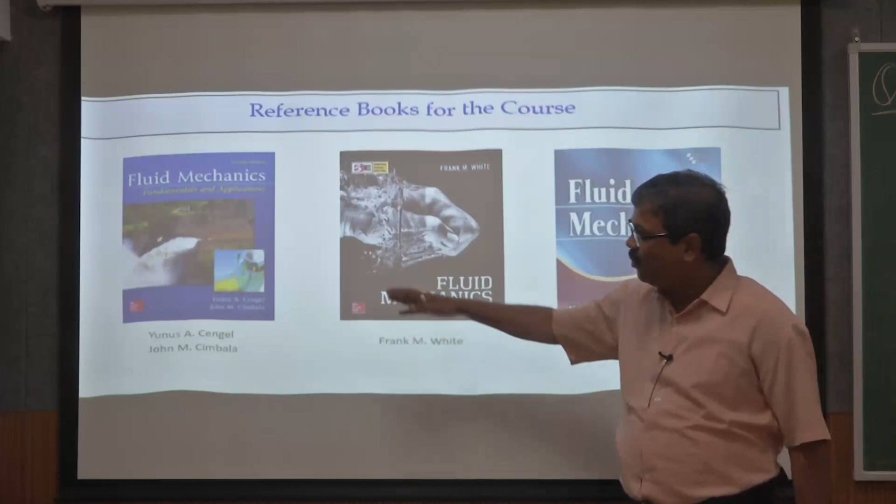As I said earlier, we are again referring to the same reference books, starting from Cengel Cimbala, F.M. White and Bidya Sagar Pani. My sincere request to you is to please look at the Cengel Cimbala book, which gives a lot of illustrations to visualize the fluid flow problems. Fluid kinematics is a very interesting subject, and besides solving the problems, we should also look at the flow behavior and flow visualization techniques. Very good illustrations are there in the Cengel Cimbala book, so please refer to that book along with the other two books as we referred earlier.

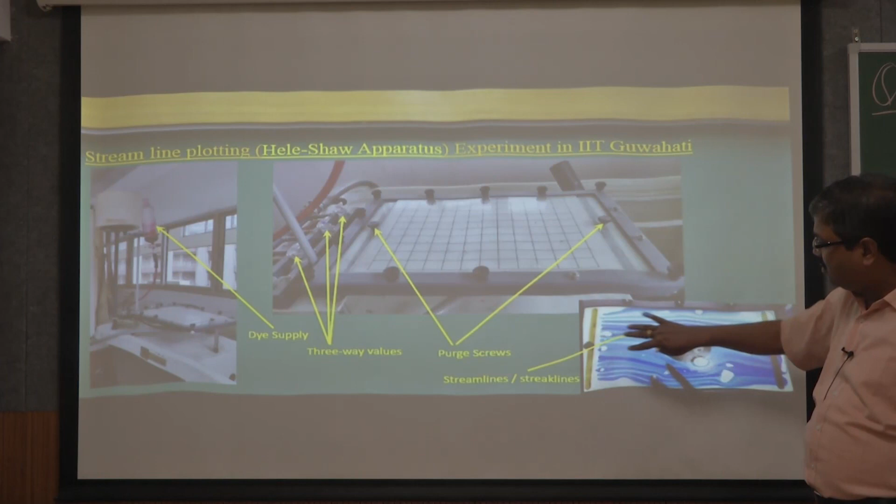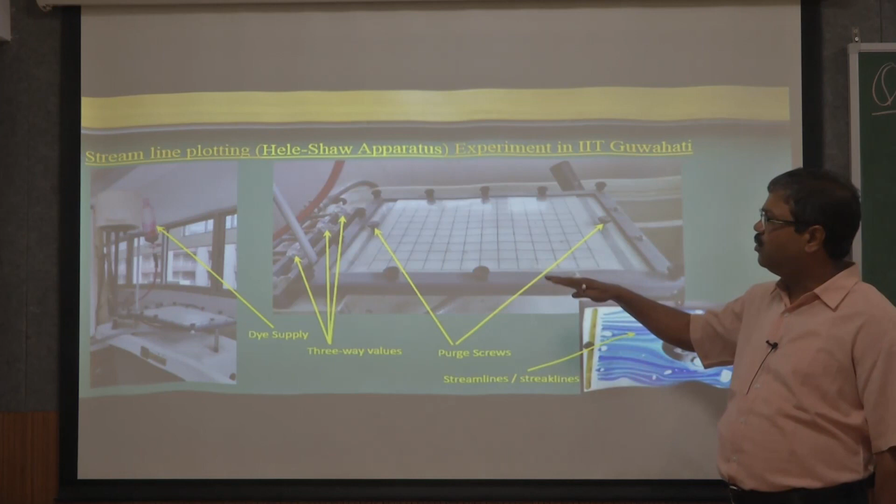We could conduct a very small experiment called the Hele-Shaw apparatus. With an apparatus like this, you can create streamline patterns, streak line patterns, and path line patterns using this small device. For example, if you have obstruction structures like this and flow patterns like this, you can see the streamline patterns, what is going on near the structures and far away from them. So it's very easy to visualize the flow when you use an apparatus like the Hele-Shaw apparatus.

If you look online, very interesting flow visualizations are available on the internet. Please refer to these flow visualization videos available there. For example, here it shows how wake formations happen just behind cylinders when uniform flow is going on, and how these wake formations happen is a very interesting phenomenon.

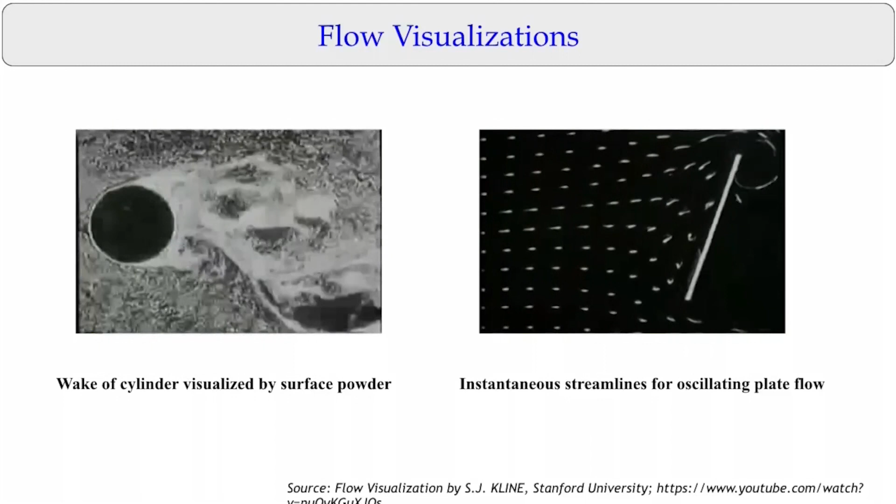Similarly, you can have an oscillating plate, and because of the oscillating plate, the streamline patterns change with respect to time. The path lines and streak lines can all be visualized using this type of video. So my sincere suggestion to you is to please visualize these flow patterns by visiting YouTube sites, where you can see how the flow patterns are changing.

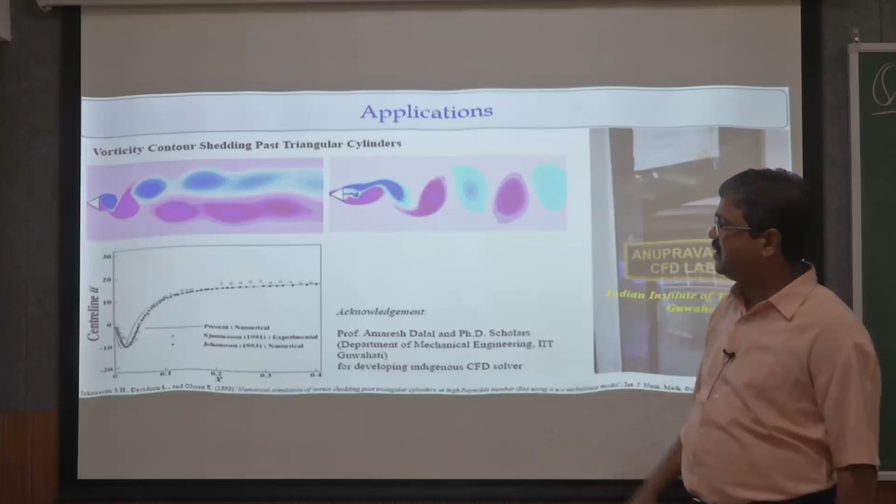This is similar to an example we showed earlier, where if you have triangular structures, you can see how wake vortex shedding happens, and it's quite interesting to see these unsteady patterns of wake vortex. This data is obtained from CFD solutions, and we can get these interesting vortex patterns along with comparisons of how the centreline velocity changes against experimental data.

So what I want to say is that if you look at this advanced level of flow visualization techniques and experimental techniques available today, we can study very interesting flow problems. We can get solutions and visualize the streamlines, streak lines, pressure distributions, velocity distributions, and acceleration distributions — all these fields we can see.

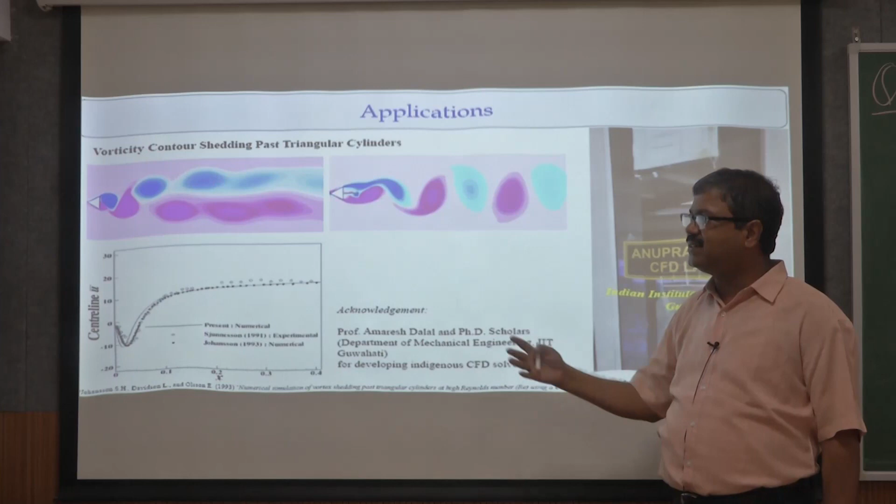With these introductory remarks, let us solve the six problems on the blackboard.

Before starting the blackboard applications, let me recap what we already discussed in fluid kinematics. Any velocity field can be defined by three scalar components, and each scalar component of velocity can depend on position and time, the independent parts — that gives the velocity distribution. Similarly, the rate of change of velocity is acceleration, which we define in terms of local acceleration and convective acceleration parts.

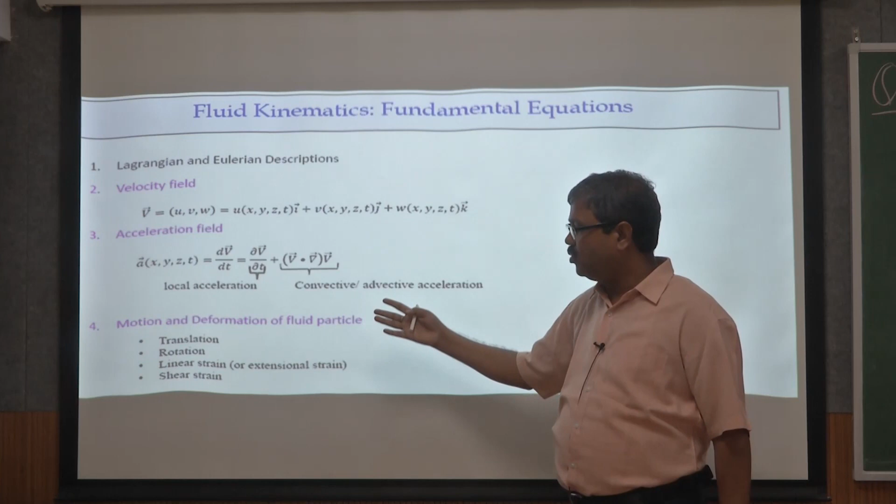Similarly, the motion of fluid particles can involve four types of motion and deformation: translation, rotation, linear strain, and shear strain — we discussed this in more detail in the last class. So here I am just doing a recap for you: the velocity distribution, the acceleration field, and translations, rotations, and deformations like linear and shear strain. If you look at rotation, we can write the rotation quantity in terms of the velocity field. Similarly, the shear strain components can also be written in terms of velocity gradients.

And we have the vorticity measures, which we derived in detail. We can compute what the vorticity would be in different cases. Look at that - when the flow is incompressible, that means the volumetric strain equals 0, so the del dot product of the velocity should equal 0. These are the equations we will use in more detail when we try to solve these simple problems on the blackboard.

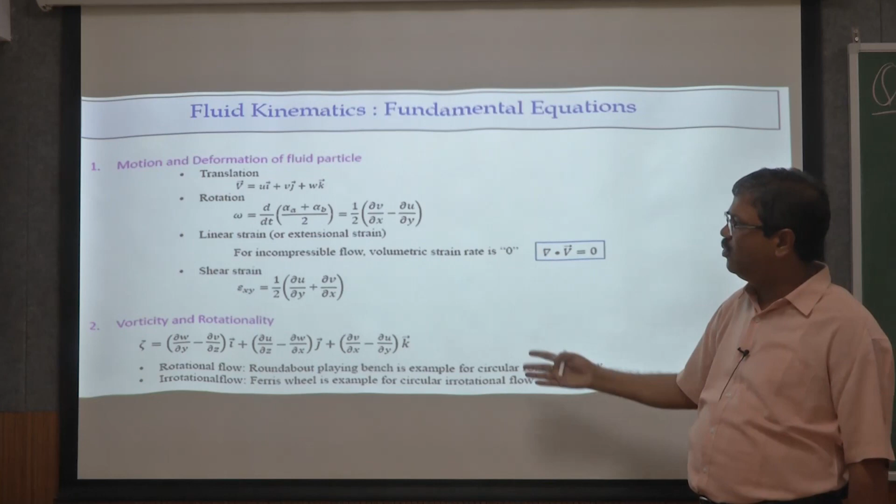So basically these are the recap, the basic equations we are going to use to solve the problems on the blackboard. Let us start the first example.

Example 1 says: what is the irrotational velocity field associated with the potential function given here? We have to find the irrotational velocity field. Does this flow field satisfy the incompressible continuity equation? So it has two steps. The first step is to find what the irrotational velocity field is.

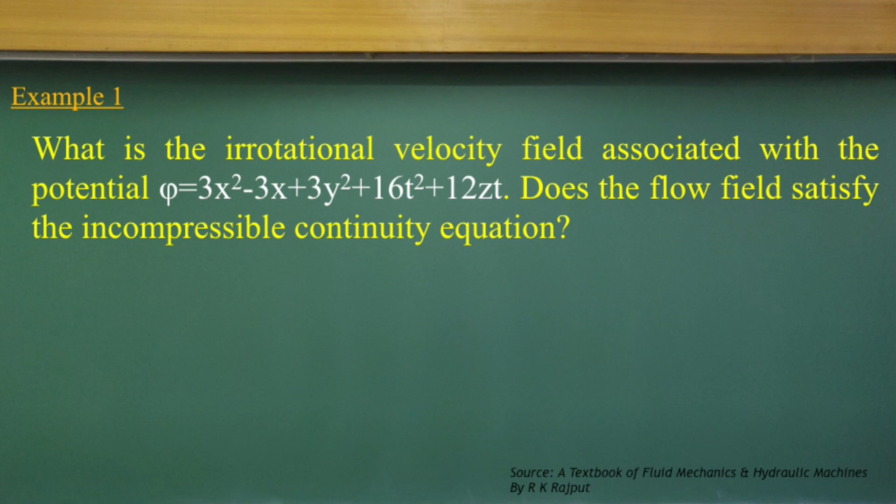So that's the point - it is already given that the flow is irrotational. That's the condition given.

That means for these velocity potential functions, which are functions of x, y, z and t - the velocity potential function is a function of the positions x, y, z and t, as you can see these independent variables.

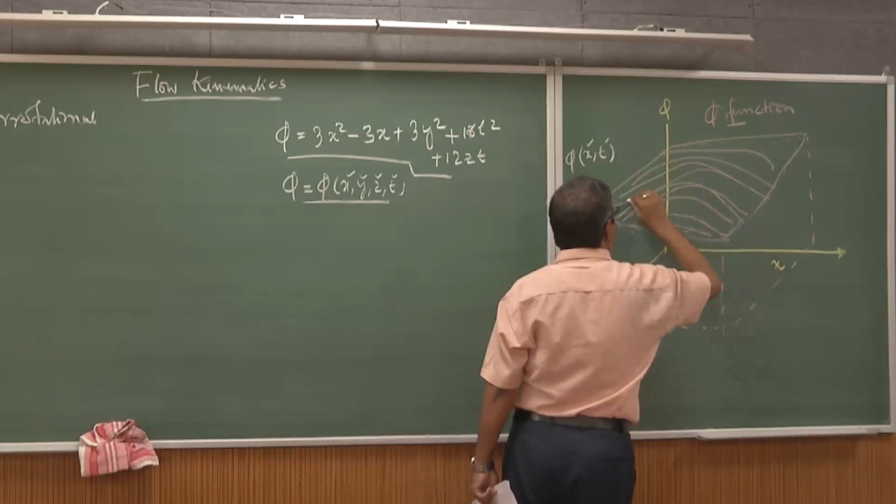Let me give a simple example. If I have the velocity potential function as only one space function and one time function, and plot these as functions of x and t, we can determine what the velocity would be as the velocity potential function satisfies for this flow field.

We know from the definitions that u will be the partial derivative of the velocity potential function, and v will be the partial derivative of the function with respect to the y direction. So these are the scalar components u and v, the velocity functions we can get.

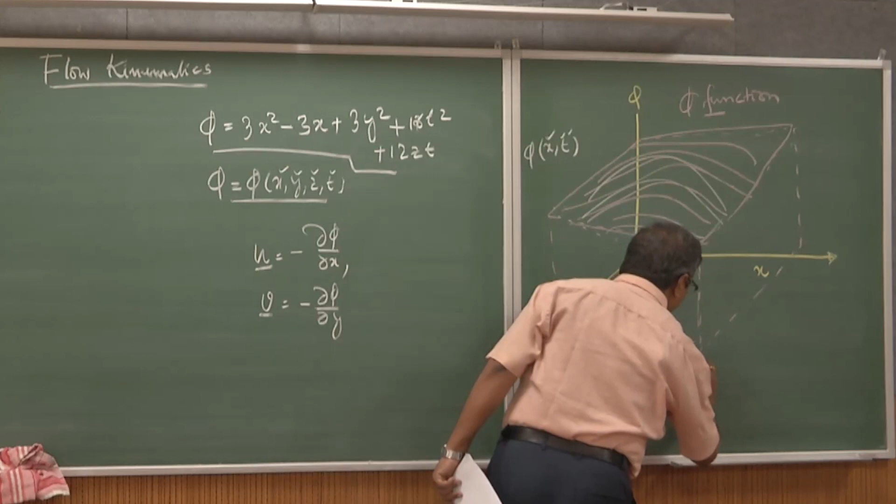So graphically, what this indicates is that when you try to find the velocity from the partial derivative, phi changes only in the x direction when you don't consider the other component - that's the negative of that, which indicates the velocity field for us.

So looking at that definition, let's come back to the problem, which is quite easy for us to solve here. As we know, u is the partial derivative of phi with respect to x with a negative sign, because it's in the opposite direction. Similarly, v will have a negative sign as well.

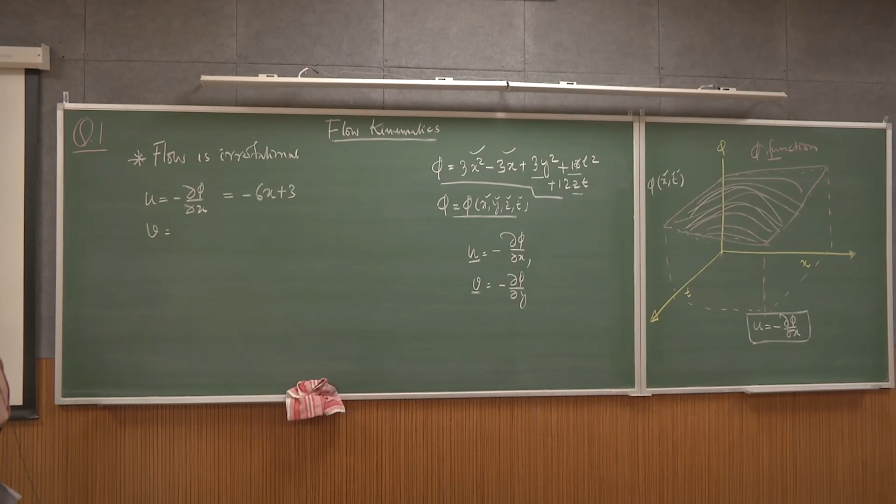If I substitute that value and compute the partial derivative of phi with respect to x, you can see that except for these two terms, I don't have an x term here, so those terms become 0. If you do the partial derivative, you get minus 6x plus 3. The same way, if I compute the scalar velocity field in the y direction, it will be the partial derivative with respect to y.

If you look at this equation again, only y appears in this term, so the others can be considered constants. If you do the partial derivative of phi with respect to y, you will get minus 6y. So these are the two velocity fields we obtain from this case.

Now, these are the velocity fields - that's part A, which is what we were looking for: the irrotational field.

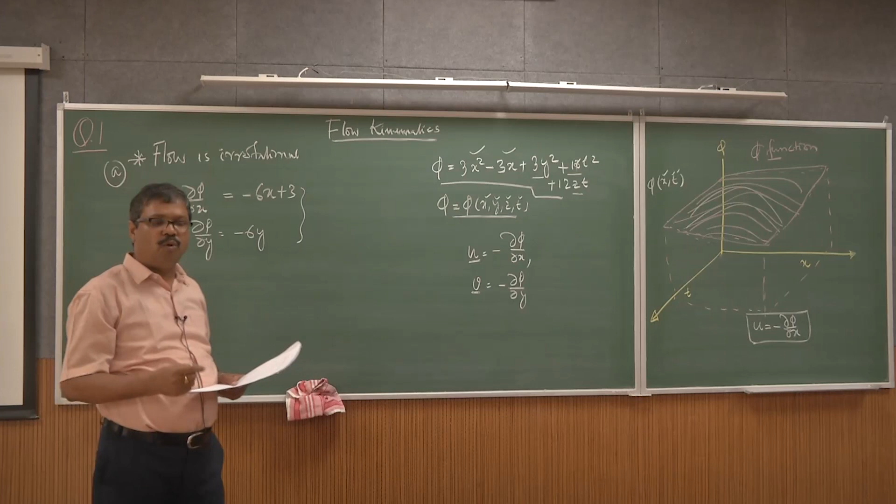Now the second part of the problem: does the flow field satisfy the incompressible continuity equation? Since the flow field we are looking at is two-dimensional, the continuity equation for a two-dimensional flow field will have del u by del x plus del v by del y equal to 0.

So it's quite interesting to look at that. That means we can again do a partial derivative with respect to x, and also a partial derivative with respect to y, and substitute it. If it is satisfied, then we can say it satisfies the continuity equation.

So if you look at this part, if you do del u by del x, we get minus 6. Similarly, del v by del y will also give minus 6. So substituting these values, what do we get? Minus 6 plus minus 6 is minus 12. That means it is not satisfied.

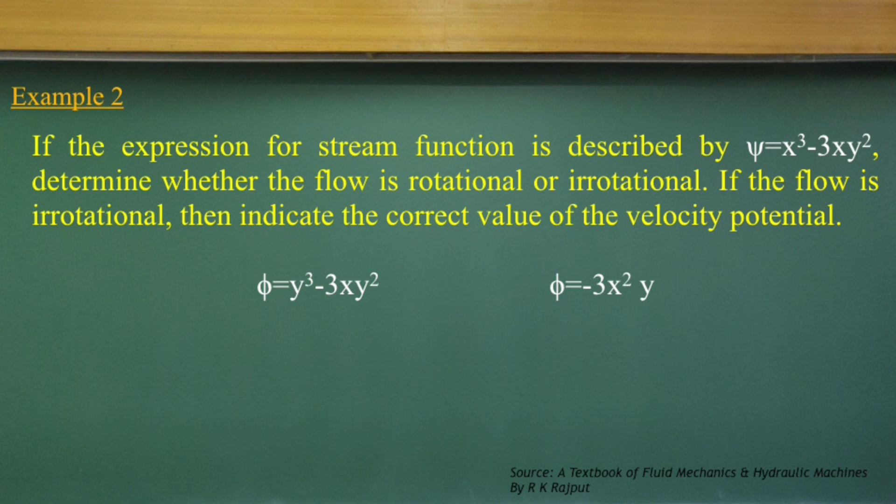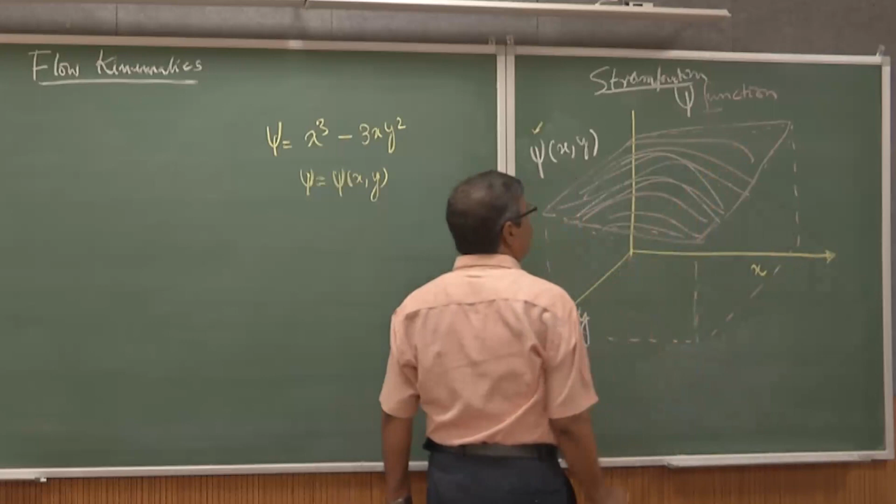The first part of the problem is to prove whether the flow is irrotational or rotational. The stream function is a function of only the two-dimensional x and y, representing the stream function like this, and we try to find out whether the flow is rotational or irrotational.

The question is to find out whether the flow is rotational or irrotational. What do we mean by that?

That means we have to compute the vorticity. If this vorticity becomes 0, that means we can say the flow is irrotational. So we have to find out the vorticity vector.

In this case, it is only two-dimensional. We need to compute the vorticity vector in the z direction. If that becomes 0, then that indicates the flow is irrotational. If not, the flow is rotational.

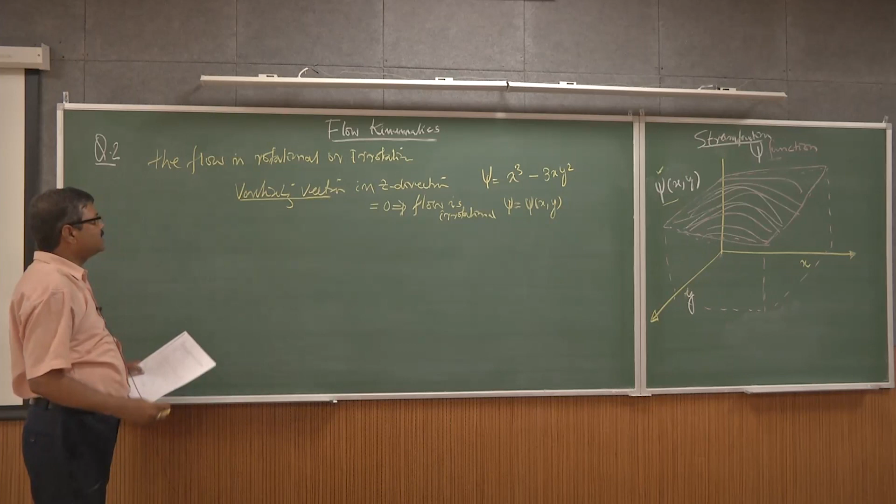Let us compute the vorticity vectors. Mathematically, we define the vorticity vector in the z direction as a function of...

the partial derivative of the v scalar component with respect to x, minus the partial derivative of the u scalar component with respect to y. This is the vorticity vector component in the z direction. So we are just looking at the z direction vorticity component.

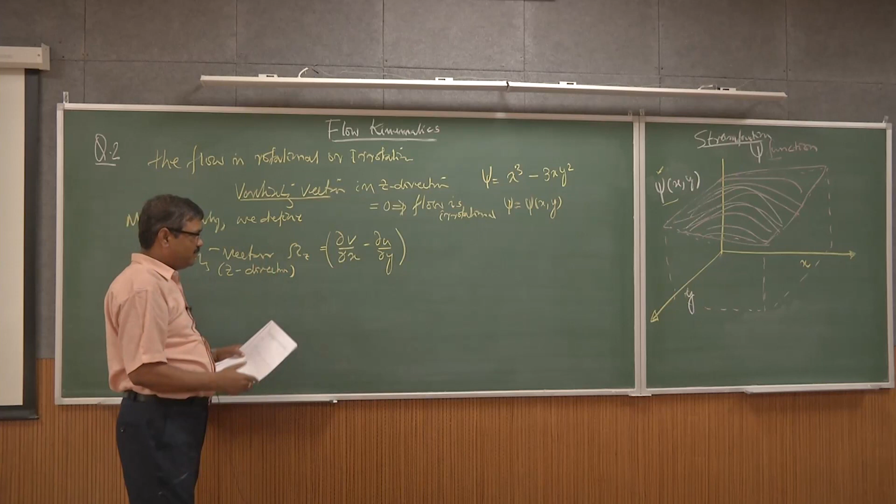Only the z direction. Now the problem is simple: we do a partial derivative of the stream function to compute u and v. Once we know that, we can compute the vorticity vector. What is the relationship between the stream function and the velocity scalar components? By definition...

what we know is that the velocity component u is the partial derivative of the stream function with respect to y, giving the scalar component in the x direction. And v is given by the partial derivative with respect to x; the negative of that represents the v component, the scalar component in the y direction.

By substituting the value of the stream function, we get u equal to minus 6xy... wait, this comes out to be minus 3x squared minus y squared, and similarly for the other component.

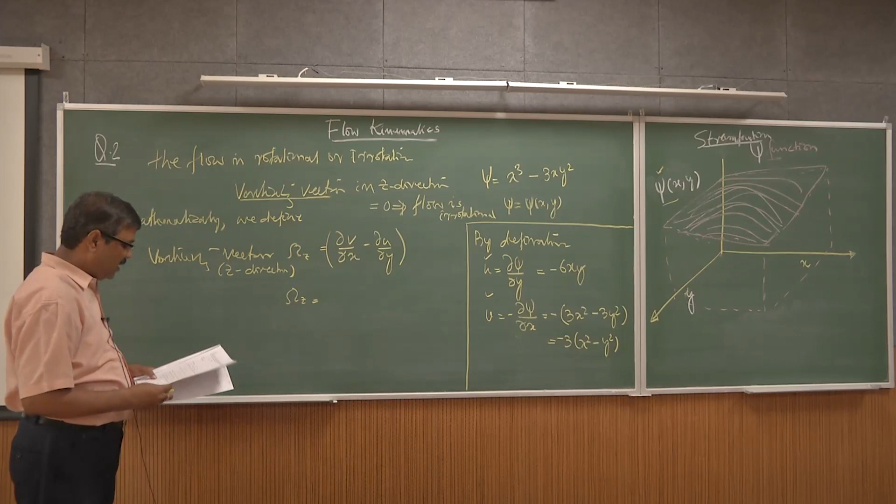That's what you can compute. Doing the partial derivatives, without going step by step, you get minus 6x minus of minus 6x, which equals 0. This indicates the flow is irrotational.

That's the first part of the solution: we have proved that the flow is irrotational, as the vorticity vector becomes 0.

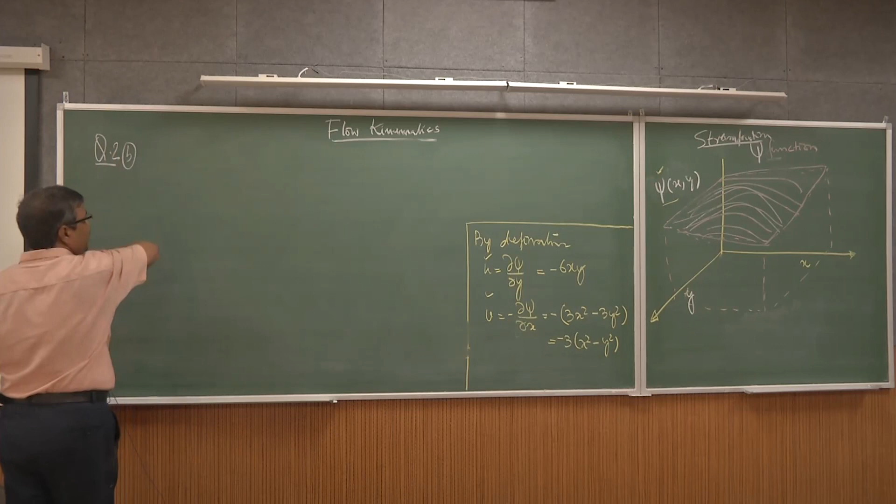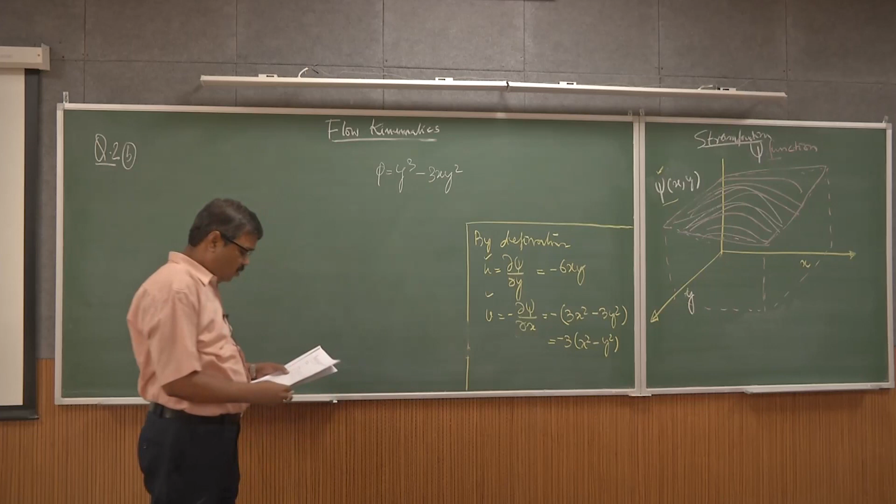That's the first component. The second part is that if the velocity potential function is given to us - in this case, phi equals y cubed minus 3xy squared - we need to find out whether this also indicates the flow is irrotational.

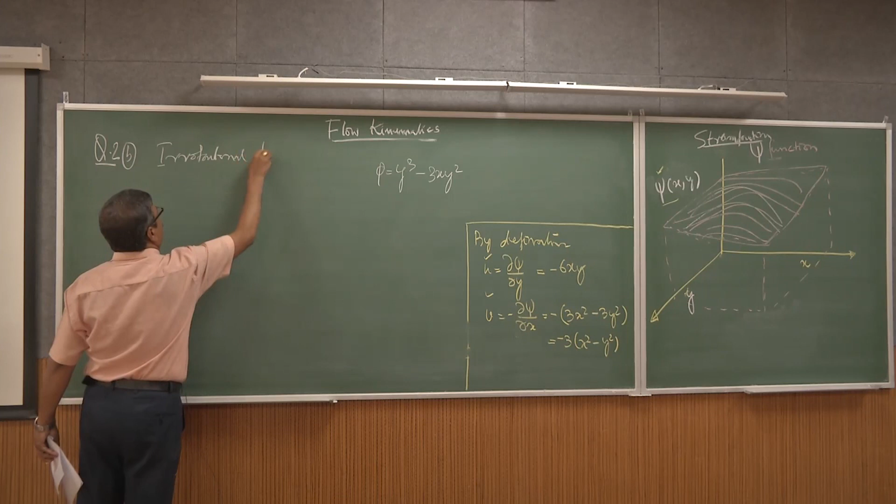That means the condition is the irrotational flow condition.

That's what also we can get. The basic equation for irrotational flow is the Laplace equation with respect to the velocity potential function, equal to 0. This is the Laplace function with respect to phi in the two-dimensional form, the x and y components. So that is indicating for us to substitute the phi value and check does it satisfy equal to 0.

If it is equal to 0, then flow is irrotational. When I substitute this value, we compute the first components, which is, if you just split it like this, you can easily find out what the values could be.

For example, if you take the function y cubed minus 3xy squared, and do a first partial derivative, this 3y squared will come in. If you look at the second partial derivative of phi with respect to x, we can split it like this, and looking at these terms, you can find the first partial derivative gives us minus 3y squared. The second term, since it's not a function of x, will give us the 0 value. The same way, if I compute the partial derivative with respect to y, that gives me 6y minus 6x.

So if I substitute these values, the Laplace equation of phi squared gives us 6y minus 6x. So it is not equal to 0. That means the flow is rotational, and it does not satisfy the basic equation of the Laplace equation, which is the continuity equation for the flow field.

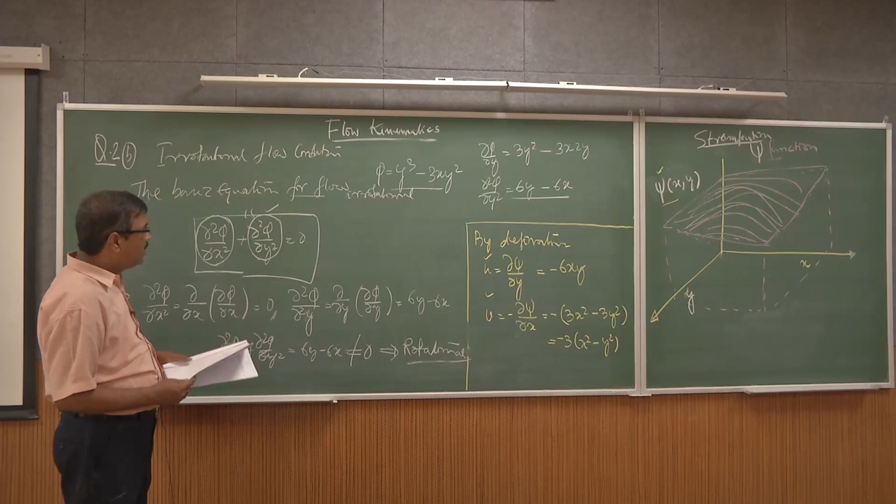The similar way, if I go for the second component where another phi function is given, phi is y cubed minus 3x y squared. So we have to again change the functions and find out whether it satisfies the Laplace equation of the phi value. If it satisfies the Laplace equation, then we can say this is the velocity potential function for this flow process.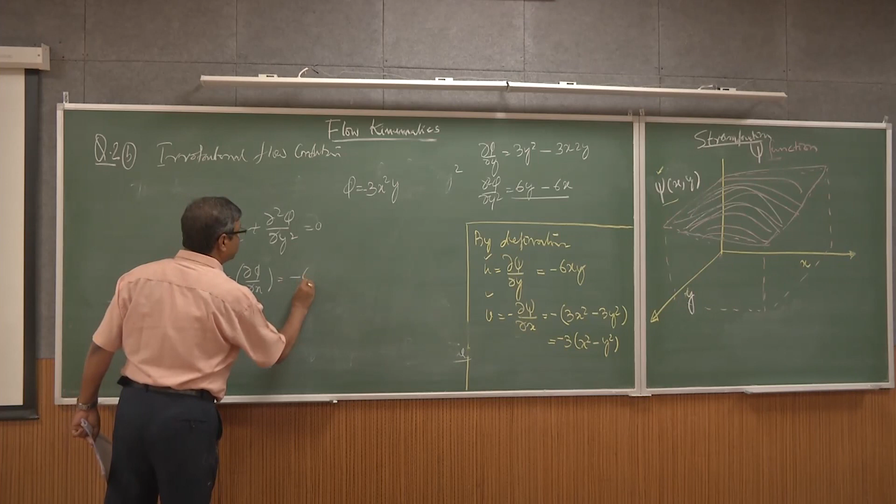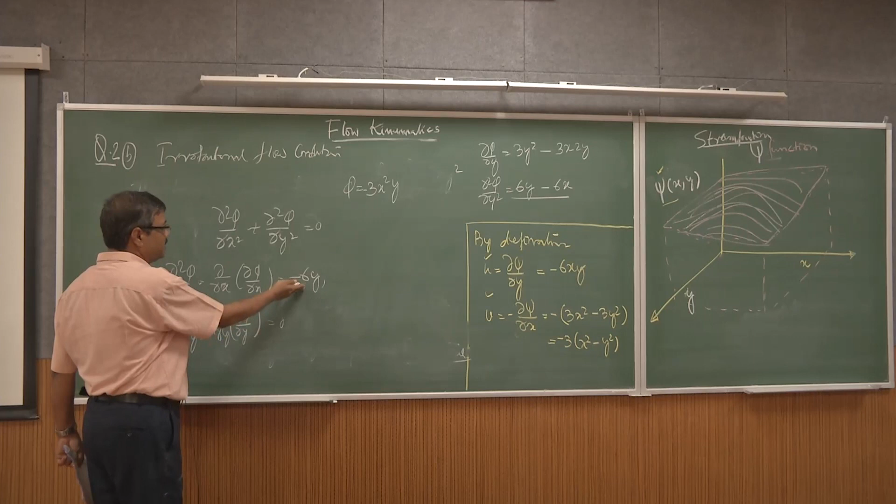If I substitute these values again, computing the partial derivative of phi with respect to x, and the second partial derivative of phi with respect to x, that gives us minus 6y. Similarly, since it's only first order in y, I can easily say this becomes 0. So if you look at these two terms, minus 6y and 0, after substituting into the Laplace equation, that will not be equal to 0.

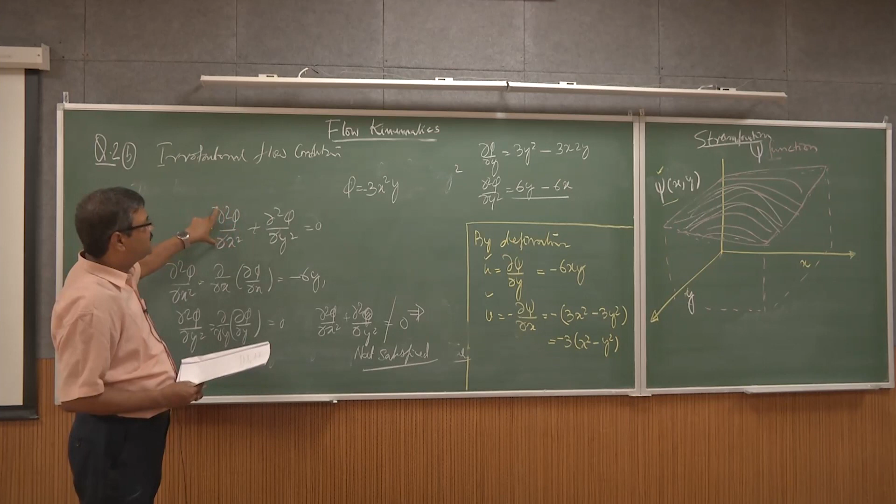So it's not satisfied. This is a very simple example just to check, by substituting the velocity potential function, does it satisfy the Laplace equation? If it satisfies the Laplace equation, that means it's a velocity potential field. If not, then it is not an appropriate velocity field to define this flow behavior. So that is what we have to look at for this case.

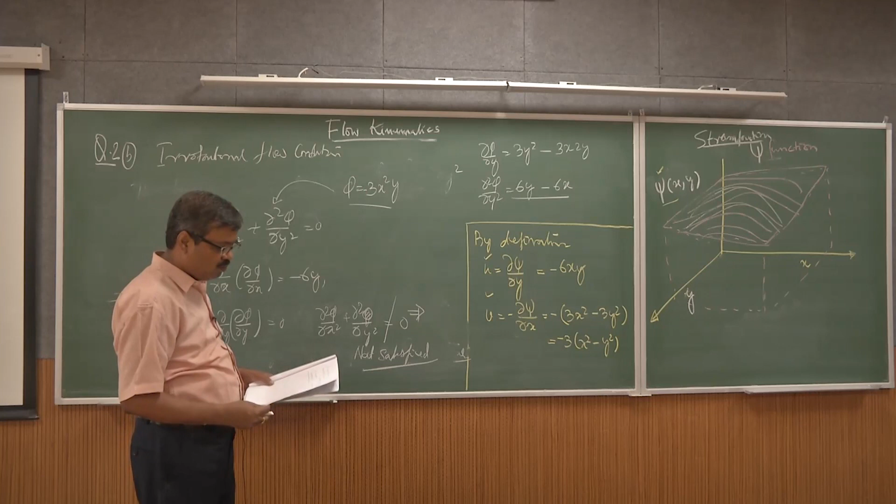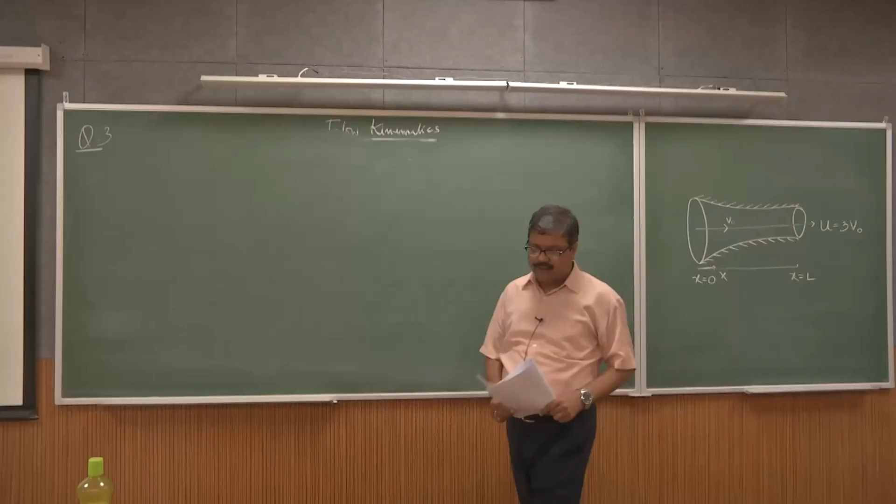Let us solve the third example, which is a very interesting problem. The flow through a converging nozzle as given in the figure can be approximated as one-dimensional flow. A velocity distribution is given with respect to x, and from the nozzle shown in this figure, assume the velocity varies linearly: at the entrance point it is v naught, and at the exit point the velocity will be 3 times v naught. The velocity distribution is given with respect to the x direction. This is the nozzle.

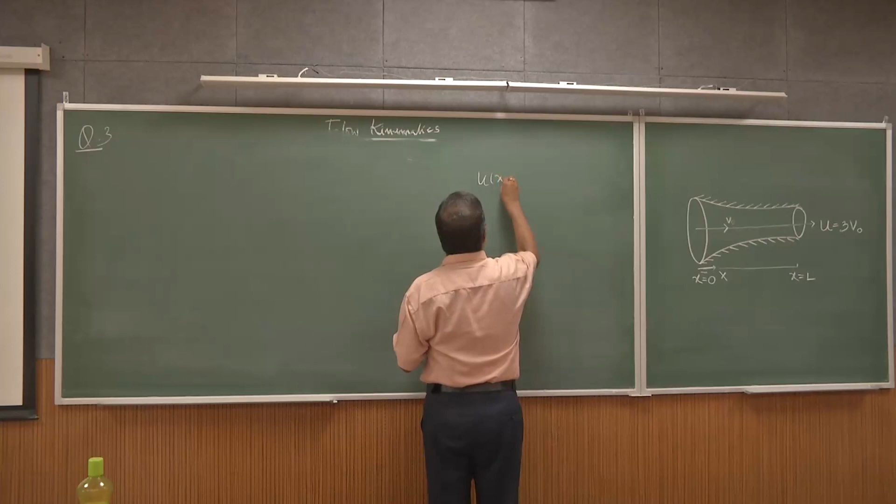The velocity field is given as ux equals v naught times 1 plus 2x over L. This is the velocity distribution given to us.

What we need to compute is the acceleration in the x direction, du by dt, at the entrance point where x equals 0, and at the exit of the flow. Given these conditions, we need to compute what the acceleration ax, du by dt, will be, if the numerical value of v naught is given as 10 feet per second, and L, the length, is 1 foot.

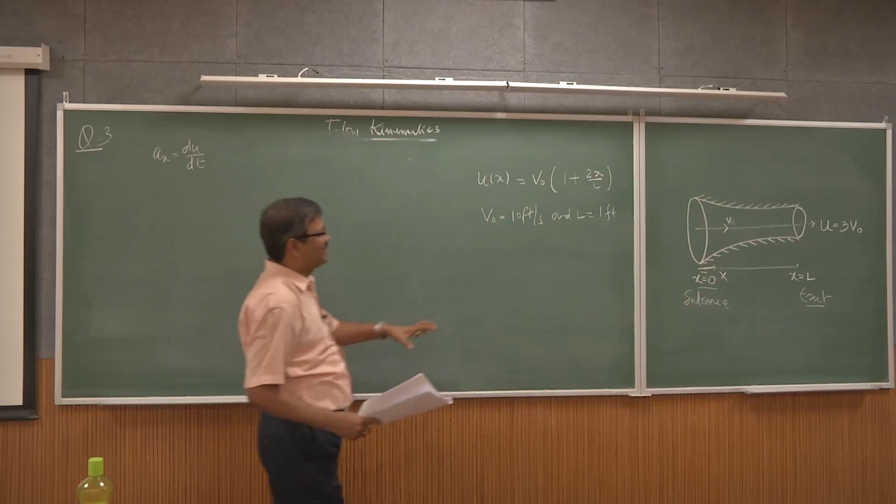Now if you look at this problem, it's very easy. It may be described as converging nozzles, giving the velocity, an increase of velocity as the nozzle dimensions show a decreasing trend. But mathematically, it's very easy since we are defining the acceleration.

Acceleration is the total derivative of the u component with respect to time. As given in the figure, this is a one-dimensional flow, only x direction component, meaning the x direction acceleration along the x direction can be written in a very simple form.

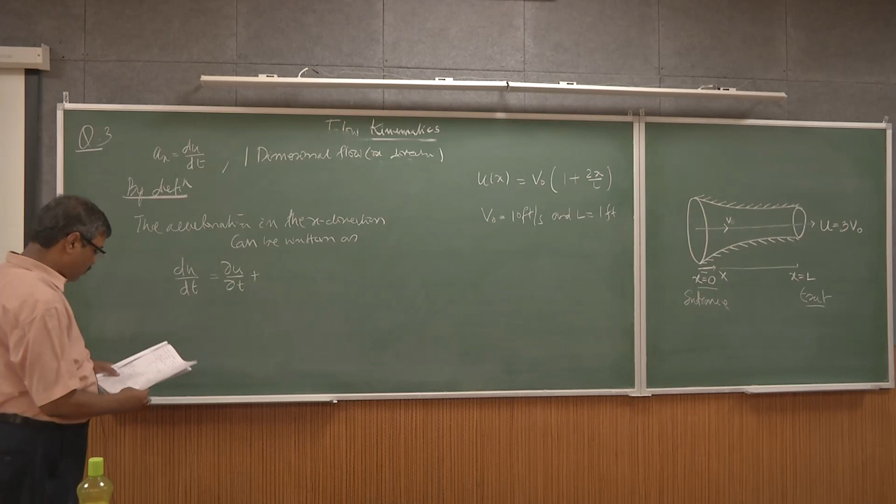It's just taking the definition that acceleration will be the total derivative du dt, which can be represented as the partial derivative with respect to time, the local acceleration component, and the convective acceleration component in the x direction.

But if you look at this problem, what components can be neglected? Since it's a steady flow, there is no time component, so we can make this equal to 0.

And since it is a one-dimensional flow and a steady flow, there is no time component in the velocity field, and being one-dimensional, these components also become 0.

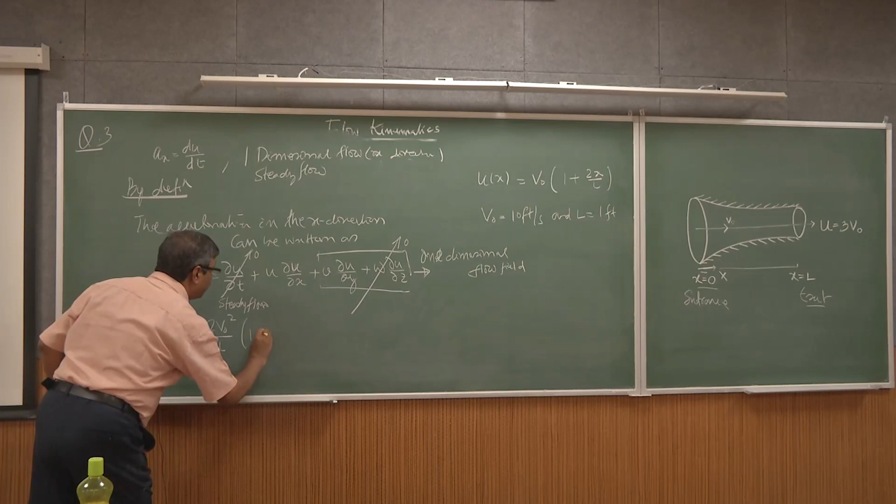So it's quite easy, we just have to compute this part. If you substitute this value and take the partial derivative of u with respect to x, and substitute it, we get du/dt equal to 2 v naught squared by L, times 1 plus 2x by L.

So it's very easy, as you do a partial derivative with respect to x, you get v naught times 2 by L, and substituting the u value, you get this result. So we know how acceleration in x varies with respect to x, as a function of v naught and L.

So we have to find out what will be the velocity when x equals 0 and x equals L, given v naught. So using the given data, we can compute this.

We can compute the acceleration in the x direction, du/dt, at x equal to 0. Substituting the v naught and L values, we get 200 feet per second squared.

The same way at the exit point, where x equals L, substituting the x equal to L value, we get du/dt equal to 600 feet per second squared, which is 3 times v naught. So we can see the velocity is increasing, and the acceleration is also increasing at that point, computed by substituting these values.

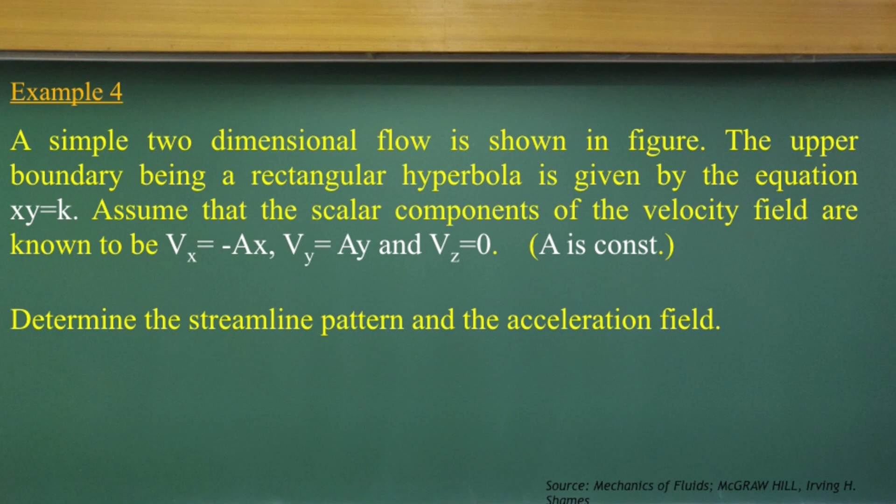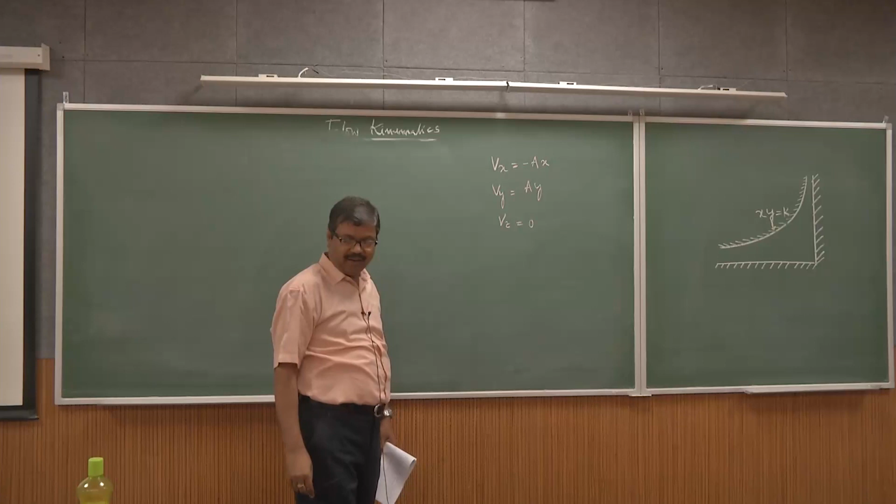Let us come to Example 4, which indicates a simple 2-dimensional flow, as shown in this figure, a 2-dimensional flow pattern. The upper boundary is a rectangular hyperbola, given by the equation xy equal to k. Assuming the scalar components of velocity field are Vx equal to minus Ax, Vy equal to Ay, and Vz equal to 0 as a two-dimensional field, where A is a constant, we have to determine the streamline pattern and also find the acceleration field.

The problem we are looking at requires us to determine the streamline pattern, meaning we are looking at what the equations could be, and also we are looking at what will be the acceleration field.

This problem is a very straightforward equation. Looking at that, as we have given the velocity scalar components, we have to find out the stream functions. Once you know the stream functions, we can derive the acceleration field. We can sketch the stream functions expanding it, and draw streamlines like this. So we are looking at what these functions are, defining these stream functions.

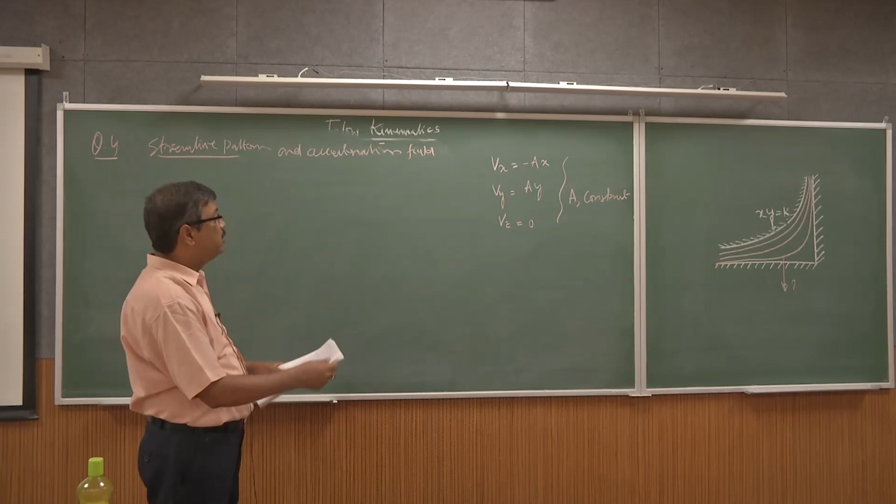Now if you look at the result part, what we are looking at here is that we need to put the basic equations of the streamline equations.

The definitions are the equations of the streamlines. What we know is that dy by dx of a streamline should be equal to Vy by Vx. This is the definition. As you know it, when you take a tangential component of a streamline, that should indicate the velocity vector. This is the velocity vector at this point, and the tangential component is parallel to it. That's the definition of the streamline.

So we are defining that mathematically. The slope of the streamline is equal to Vy by Vx. If I substitute these values, we get minus y by x. So as we are looking at what could be the streamline functions, let me size a streamline function here.

If I do the integration, integrating the above equation, we get the value, or we can write it in a very simple form, as xy equal to c.

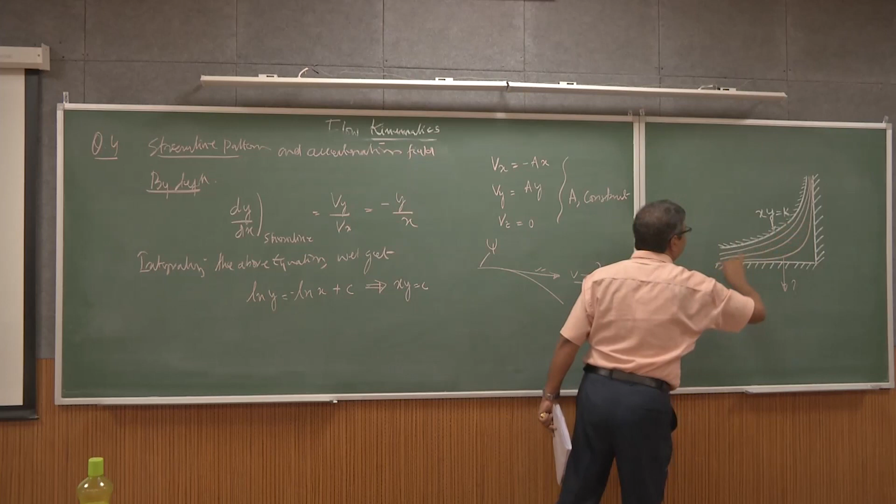That means it's indicating it will also have a hyperbolic nature of the streamline function. That's what defines the boundary, the rectangular hyperbola function which the streamline function follows. That's what we get from this equation for the streamline.

Now if you look at computing the acceleration components, basically we look at two acceleration components. As there is no time component, since the flow is steady, it's very easy to compute. We can compute ax as given earlier: du by dt, the total derivative of u with respect to time, becomes del u by del x times u.

If you substitute, as in this case this is u, and this is the v component, these components become 0. You know its value, but it doesn't have a function of y and z, so these components are 0 and these components are 0. Substituting this value, we get its value equal to a squared x.

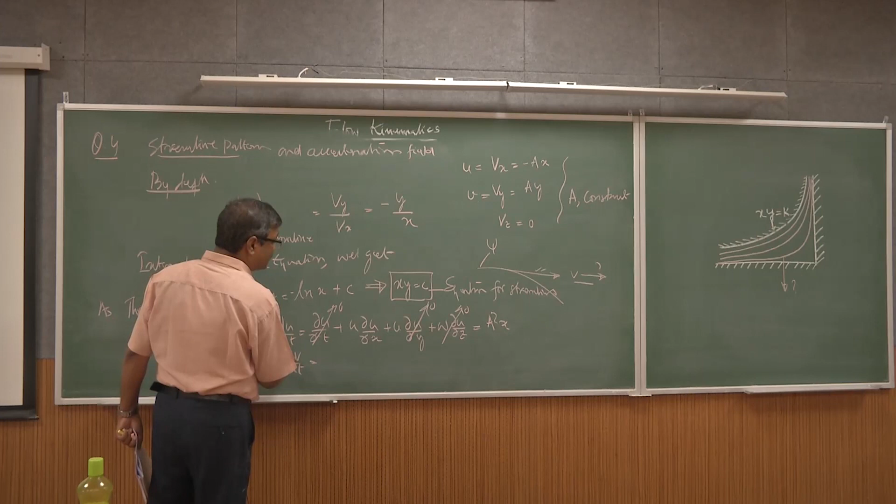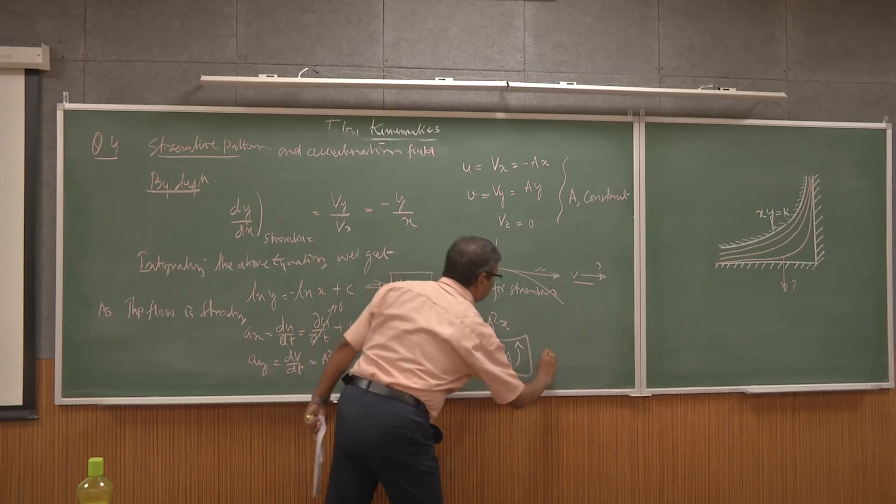In a similar way, we can compute ay, which is dv by dt. Writing the same expression, instead of u we write the scalar component in the y direction as v, and if I substitute it, I get a squared y. That means the acceleration field in two dimensions becomes a equal to a squared x i plus a squared y j component. That's the answer for this problem.

Let us solve the next example, that is example number 5.

So we need to compute it. First we have to prove that the radial velocity Vr is equal to 0 along the circle when r equals a. So we have to first find out the radial velocity Vr, whether it is equal to 0 when r equals a, and the tangential component v theta.

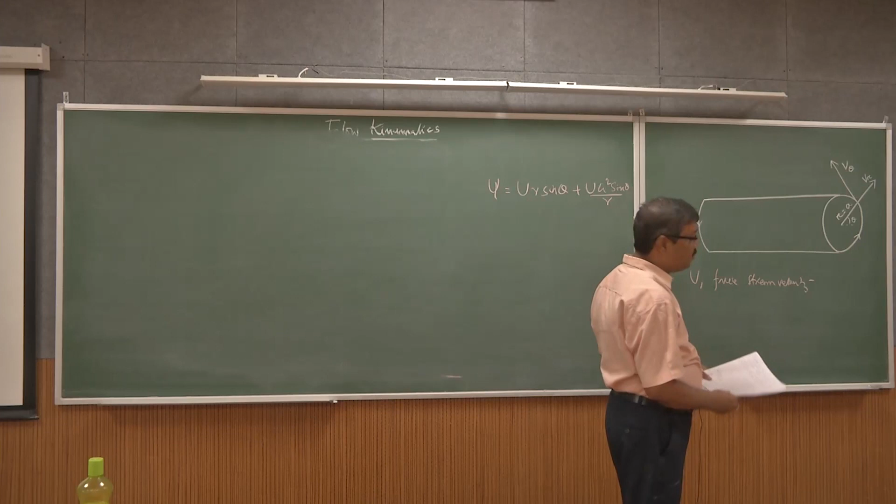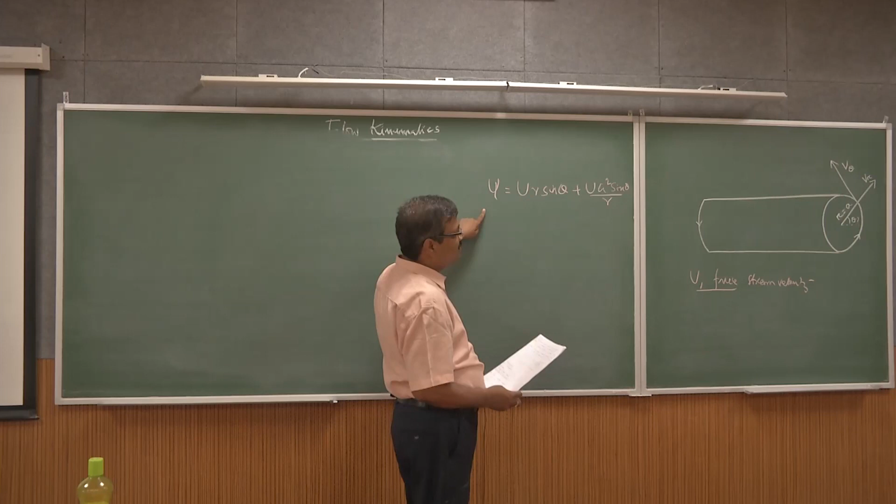We also have to find out the value of theta where the magnitudes of the velocity vectors should equal the free stream velocity components. It's a bit of an analytical way to compute it, but since the stream function is given to us, we have to compute the radial velocity and the tangential velocity.

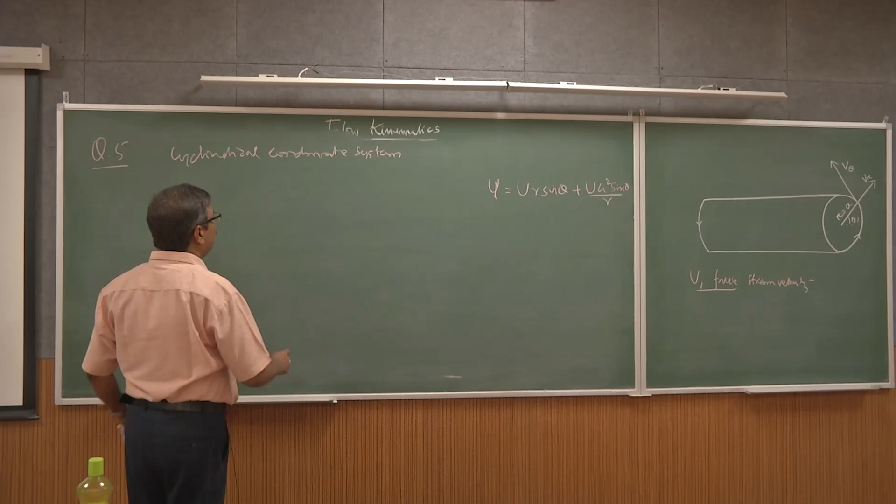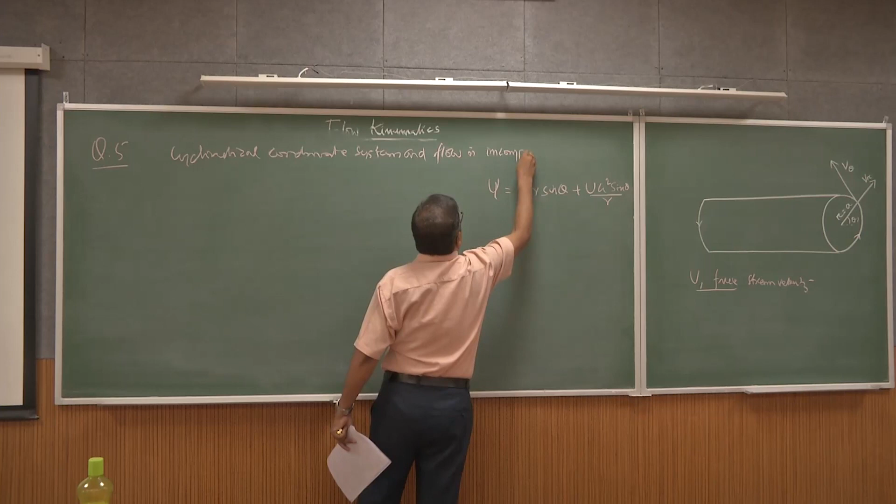The problem is very easy, but it's given in terms of a cylindrical coordinate system, so we have to write the velocity in terms of the stream function for a cylindrical coordinate system, as the flow is also incompressible.

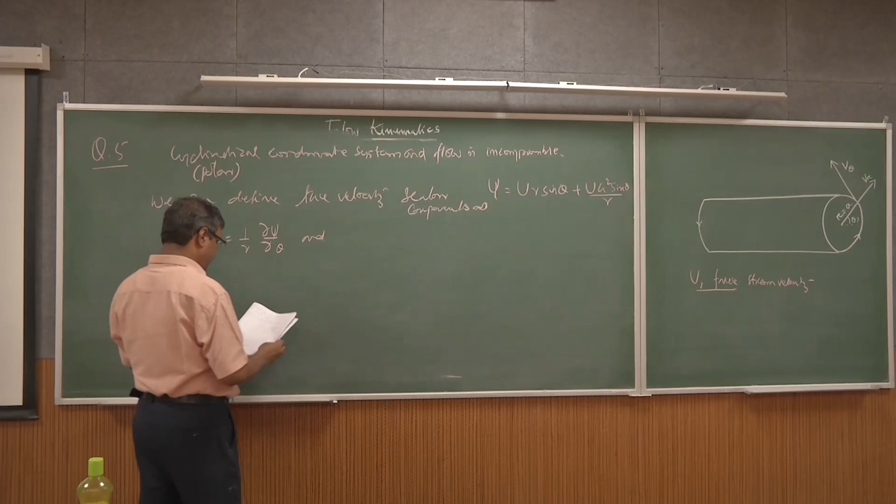In cylindrical or polar coordinate systems, we can define the velocity field and its scalar components like this: V_r will be 1 over R times partial of psi with respect to theta, and V_theta will be minus partial of psi with respect to R.

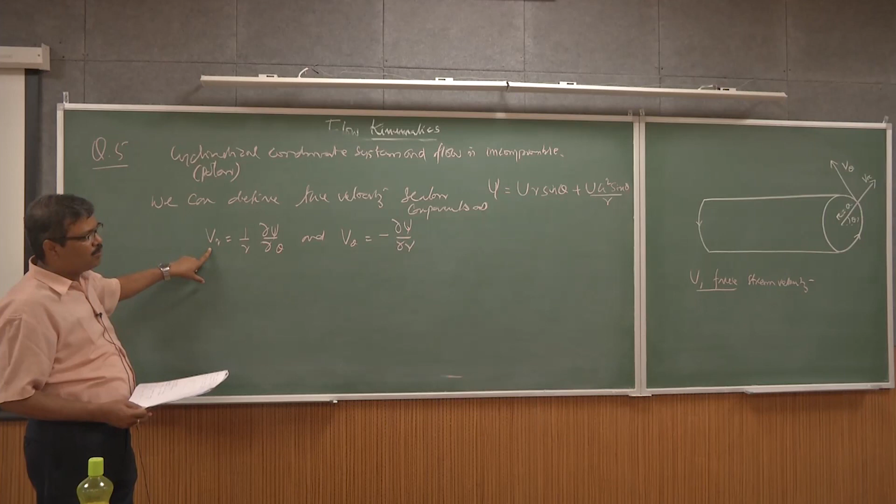Please refer to a textbook for the definitions and relationships between velocity scalar components and stream functions for a polar coordinate system, which works the same way as before. Notice the one-over-R term appears when taking the partial derivative with respect to theta. As given in this problem, we just need to find whether the radial velocity component V_r is equal to 0.

It's a very easy thing. Now let us compute it by substituting the stream function as given here.

It is U r sin theta plus U a squared sin theta over r. If you take the partial derivative with respect to theta and substitute this value, it comes out to be U cos theta times (1 minus a squared over r squared).

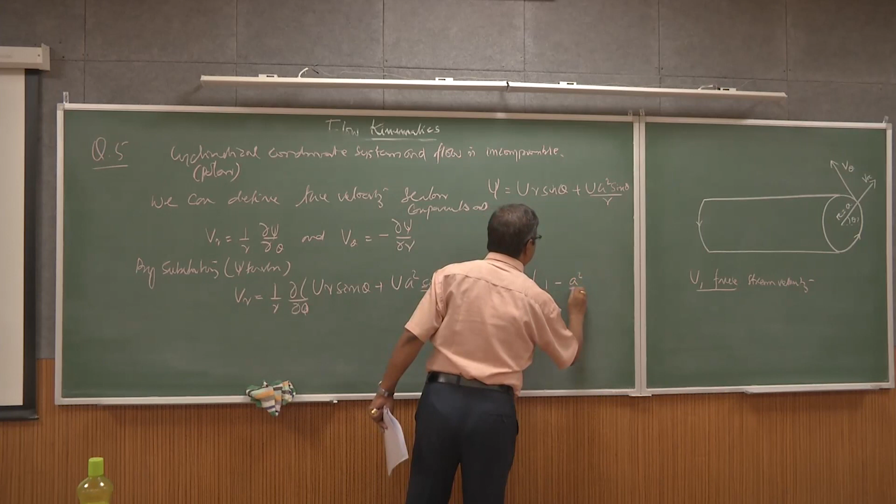If you look at this function, when r becomes a, no doubt V_r will be 0. Look at this function—if you substitute a equal to r, this component becomes 0. So V_r will be 0. That is the first component we proved.

Now let's look at the second component, the value of V_theta. That means taking the partial derivative with respect to r, substituting the stream function, and negating it, which gives the tangential velocity component at theta.

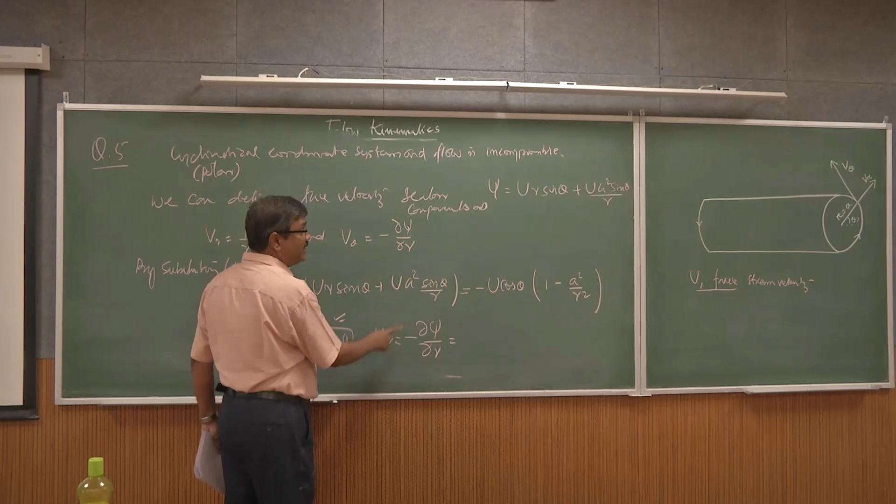What comes out is U sin theta times (1 plus a squared over r squared). So when a becomes r, that is, when a equals the r value, you get V_theta equal to 2 sin theta times U, which is the tangential velocity.

So at r equal to a, the radial velocity is 0, but the tangential velocity equals 2 times U sin theta. Now we are looking at what theta value gives us the resultant velocity vector equal to the free stream velocity. This is quite easy for us.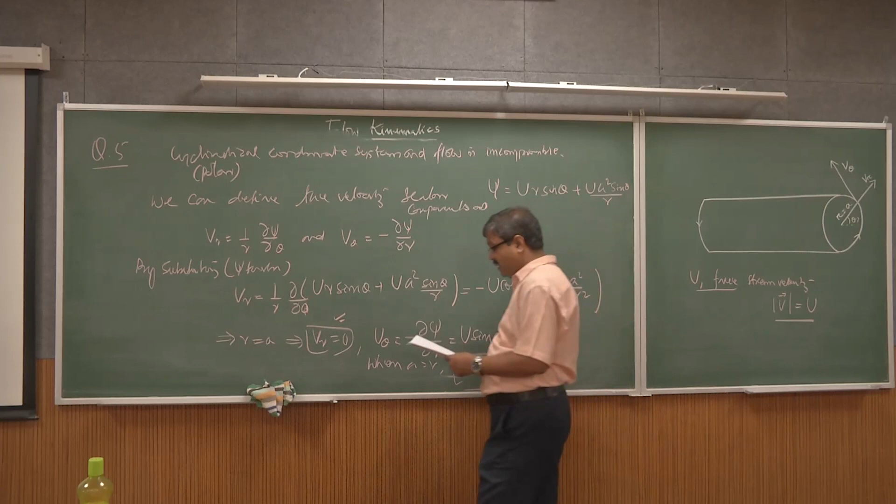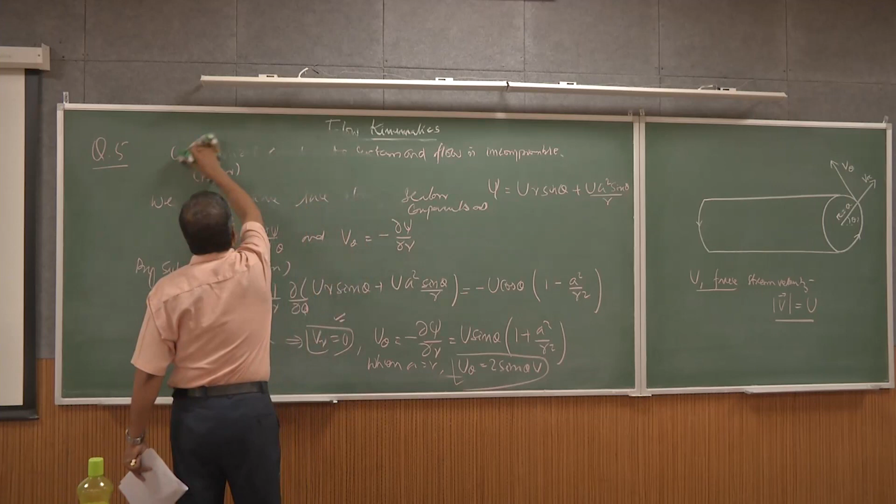Since we know V_r and V_theta, we can find the total magnitude of the velocity vector, and we equate that to the free stream condition at which the theta value gives a resultant velocity magnitude equal to the free stream. If I know V_r and V_theta, I can get the magnitude, and if I equate it with U, I get sin theta equal to plus or minus half.

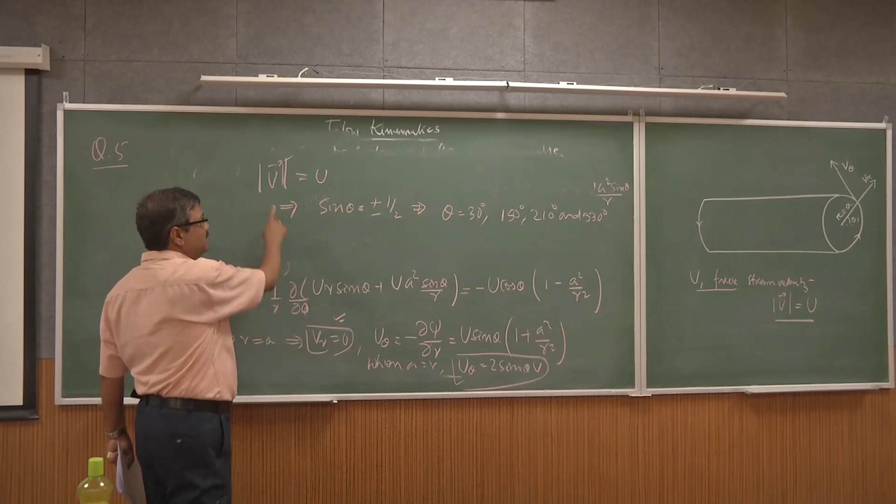That indicates theta could be 30 degrees, 150 degrees, 210 degrees, and 330 degrees. So at theta equal to 30 degrees, 150 degrees, 210 degrees, and 330 degrees, the magnitude of the resultant velocity will be equal to the free stream velocity, which is very interesting.

You can see the figures on the blackboard. A two-dimensional dipole source at the origin produces a steady incompressible flow with the stream function as given.

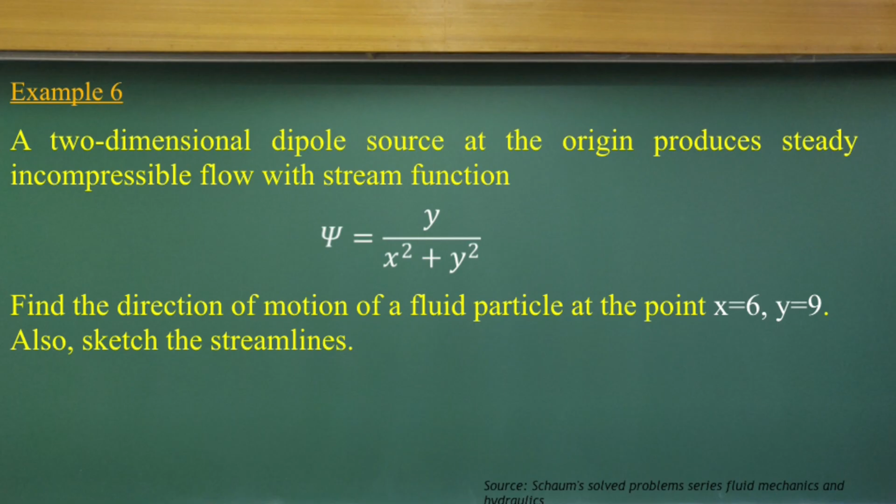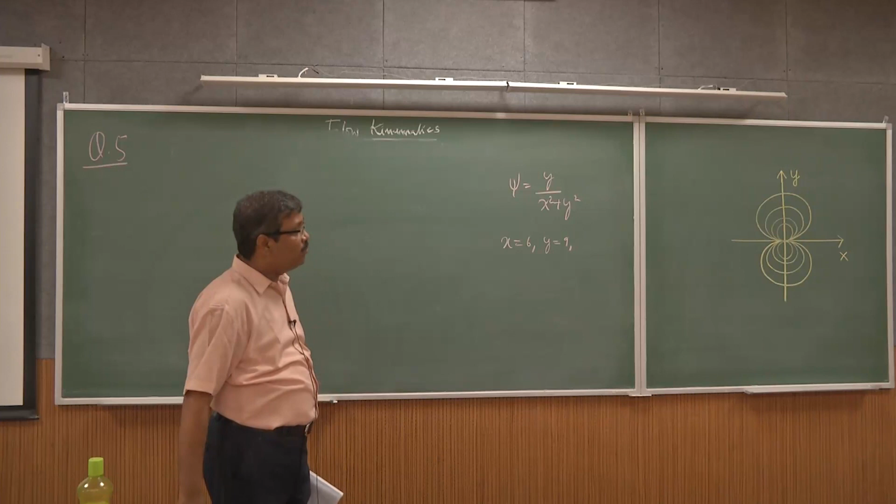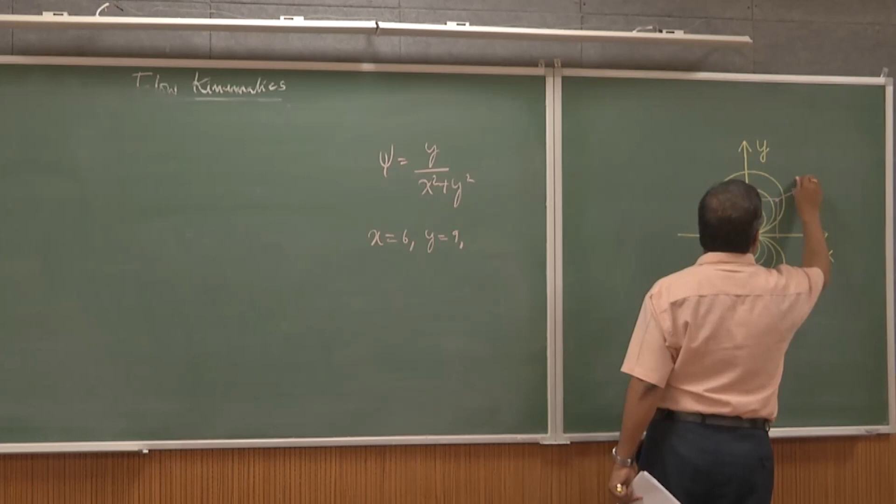The stream function is given to us. We have to find out the directions of motion of the fluid particles at x equal to 6 and y equal to 9. At x equal to 6, y equal to 9, we need to know what could be the directions of the fluid particles, looking at the function behavior at that particular location.

That means we have to find out, if a streamline is going through these points, what could be the functions of the streamline with respect to y and x, the slope components. If I know the slope component of that function at that point, that's what will give us the directions.

So first, as you know, along the streamline, d psi is equal to 0, because along the streamline the stream function's value is constant, it doesn't vary. So d psi equal to 0, that's what indicates for us. If I substitute d psi equal to 0 for this case, I'll get the expression involving x square, y square, dy and dx.

That gives us 2x dx, 2y dy, divided by x square plus y square whole square. That's what is equal to 0.

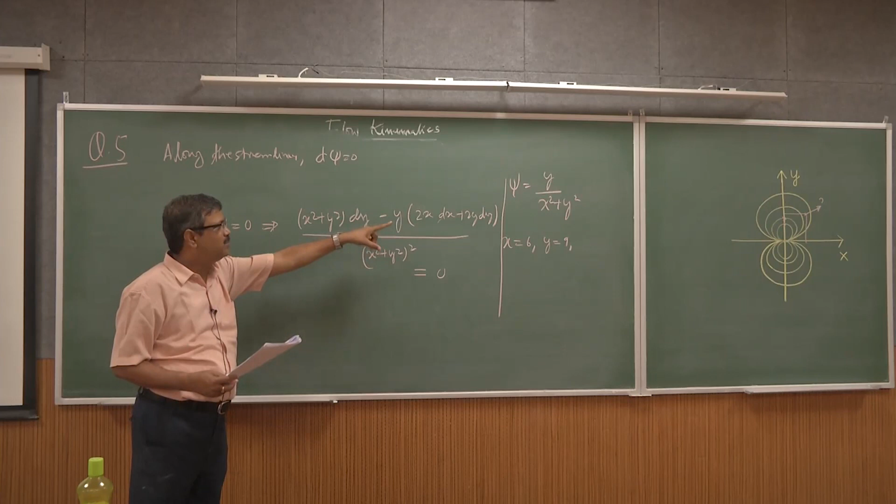So here, for a very basic case, if psi is a function of x and y, we can expand the total derivative and substitute to get these components. Just follow any mathematics book to know how this expression comes about.

If I rearrange these terms, we can get dy by dx is equal to 2xy divided by x square minus y square, and then I substitute the values of x and y.

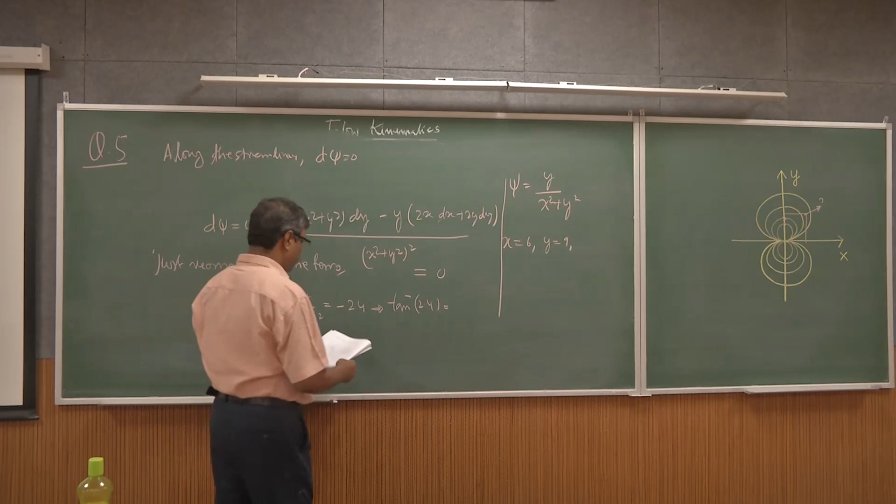As I substitute these values, it comes to minus 2.4. So dy by dx is this value. That means we can find the tan inverse of this, 2.4, which gives us minus 2.4, and that gives us minus 67.4 degrees.

So it's telling us that when you have an x and y value, the velocity vector will have an angle of minus 67.4 degrees, which gives us the direction.

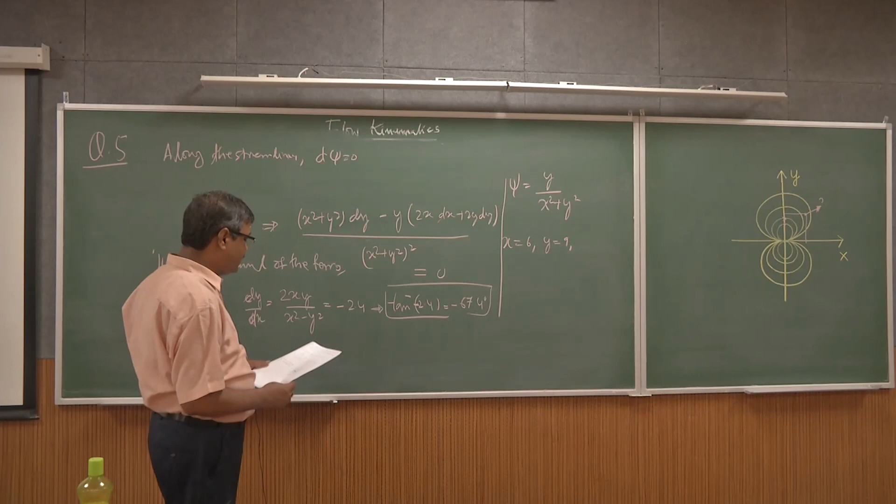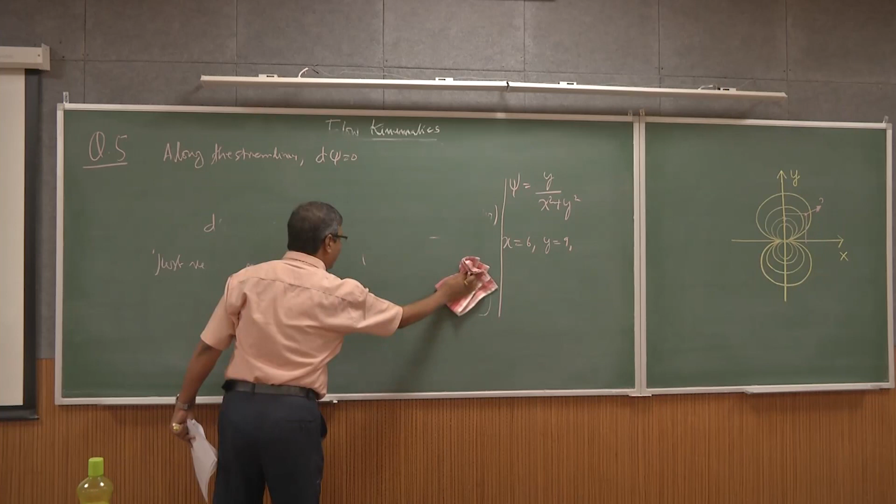Now the second component: sketching the streamlines. If you look at the streamline functions, since it's a dipole, there are two source components present, and we draw the streamline patterns like this. So it should be rewritten into functions in terms of circular equations.

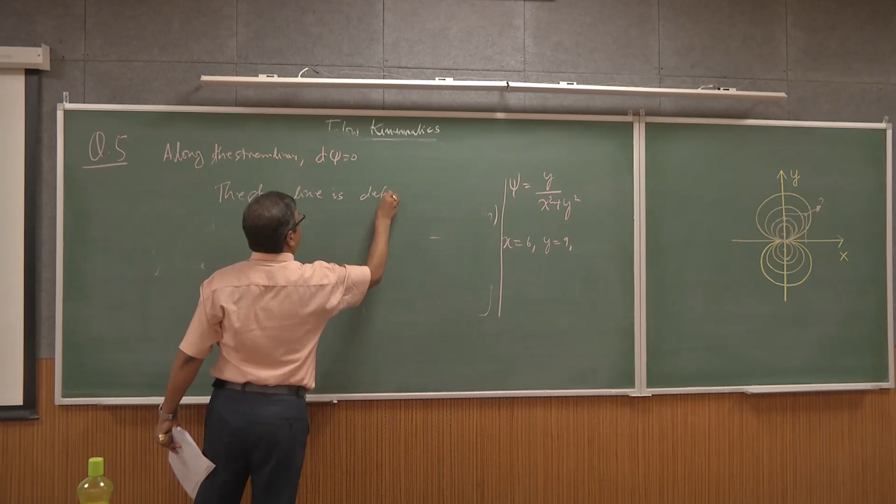Considering that, we define the streamline as a constant, defined as 1 by 2 lambda. We use 2 lambda so it's easy to write the circular equations for that; that's the reason 2 lambda is given.

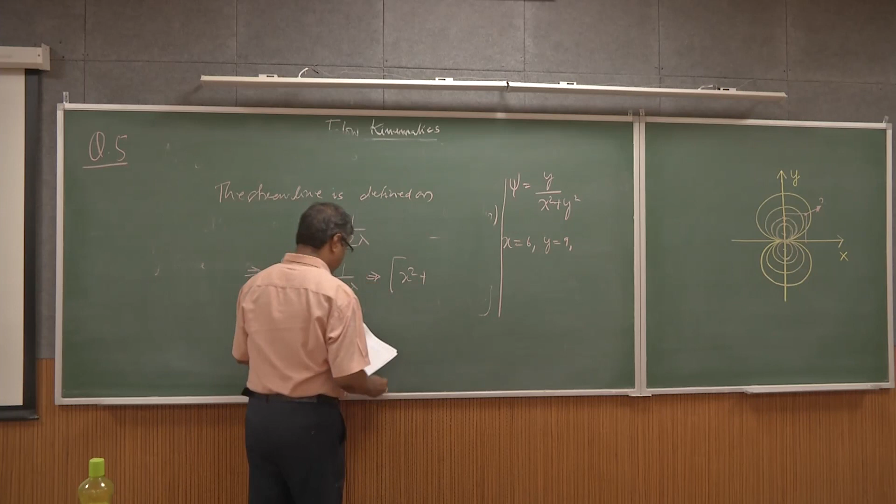Before finding out the equations, you should understand the flow conditions. In this case, you can easily see that the equation of circles will define these patterns. That's why we define the stream function as 1 by 2 lambda, and if I substitute that as y by x square plus y square equal to 1 by 2 lambda, and simplify further, we get the equation for circles, which we can write in this form.

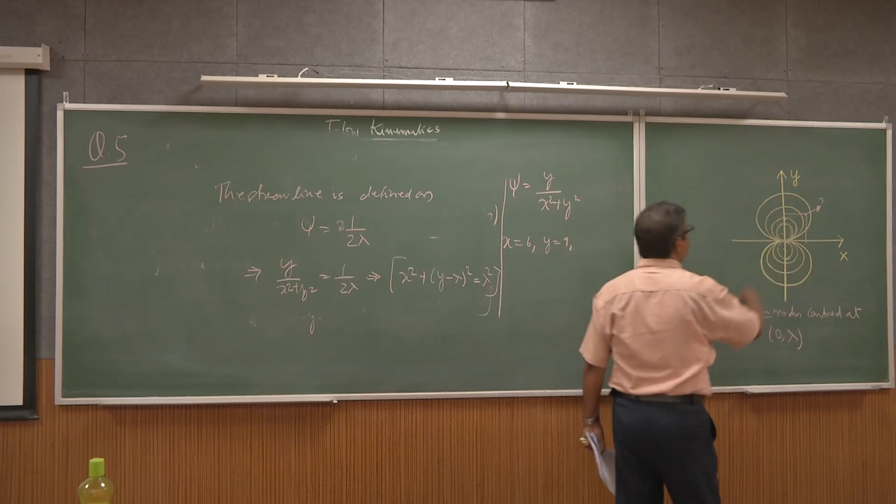That's what is represented here: it is a circle of radius lambda centered at 0, and lambda. As lambda varies, we get different circles. That's the solution for this.

So with this, let's complete this blackboard lecture, where we have prepared and solved 5 problems. Thank you.